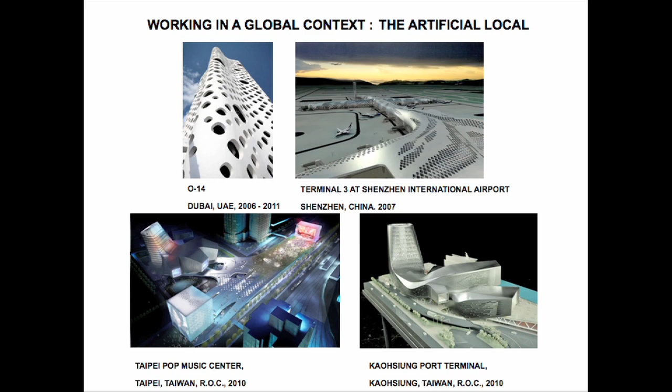Tonight we are going to talk about recent work, mainly about 3 projects: the O-14 Tower in Dubai, the Pop Music Center in Taiwan, and the most recent competition that we won last year for the Kaohsiung Port Terminal. We're also just going to touch on the airport project.

The main thrust of the lecture, because it intersects our practice, is about working more or less remotely and doing projects that occupy a very different notion of context than a classical understanding of place. Nanako and I will try to describe how the logics of construction, the way projects are designed and executed, have really shifted the territory of context, and as a consequence have resulted, for better or worse, in new kinds of cities—ones that can't be connected back to traditional form making or to traditional notions of society.

Dubai is one of those non-place places, almost an instant city and an instant urbanism, and that was the opportunity for us to finally realize a major project. I'm going to show O-14 first, and try to open up some of the issues that have retrospectively interested us about Dubai and other places.

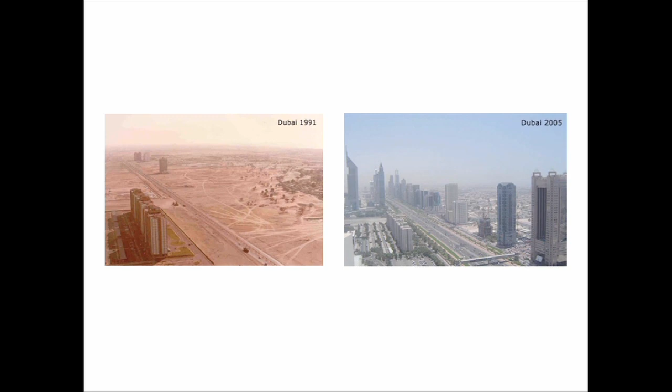One of the signal features of these places is that, since they're designed from nothing, they're programmed almost like one would program a building. Within Dubai you find the development of micro-cities, each themed, each more or less monofunctional, meaning there is very little mixed use. The way people work, live, and play is very strange because they have to drive miles to get to work—there were almost continuous traffic jams, at least up until about 3 years ago.

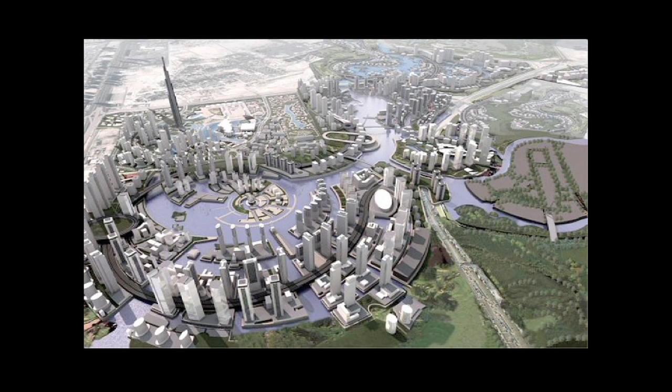There were very few options in terms of how one could live one's life. You'd basically go to a place where you'd live, to a place where you'd work, and to a place where you'd play, all by car and all back into an air-conditioned environment. A very strange place, and even stranger were the projections made for these mini-cities. This is Business Bay—an early rendering—where our O-14 is located. We called it a little slice of hell.

It was just so relentlessly oppressive in its initial planning that we had to come up with something different. We were working not at the planning level, but just at the scale of the building, but our building would somehow have to step outside of the developer norms expected in this master plan.

That was something we discussed closely with the developer, Shahab Lutfi, who was a really willing and expert partner in trying to overcome the strange homogeneity automatically expected as part of these developments. This is the reality of the site, what we first visited when we came. So you have these slick renderings and pamphlets on one hand, and then the reality of the place, as yet mainly unbuilt.

So, like I said, the final results are not characteristic of anywhere. Kuala Lumpur, Shanghai to a certain extent, and of course Dubai, are more similar than they are different.

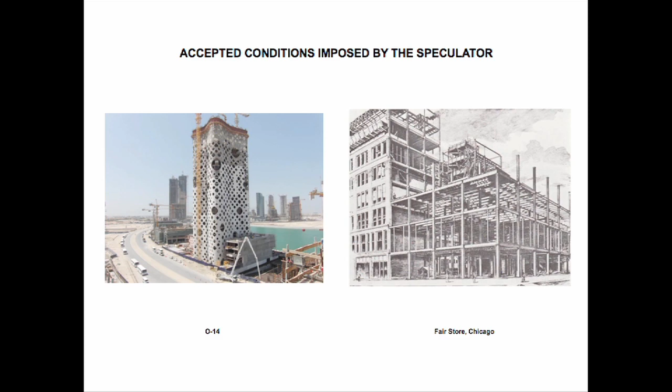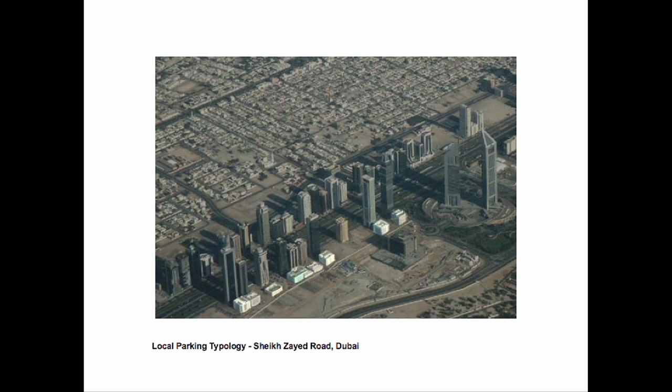It wasn't just about icons, but also about operational issues in the city, because as a consequence of all those micro-cities, themed cities, you get a proliferation of tall buildings along main streets. This is Sheikh Zayed Road. And then just behind all those tall, iconic buildings, you get one after another a series of parking structures. So you get a very active frontage with the iconic building, and all the pragmatic stuff happens behind, but that street is completely dead. People don't really walk around on the street, they're delivered almost entirely by car, so this is accepted — but it was something we wanted to challenge.

We were given a set of very precise codes to follow in Business Bay, mainly developed by the British firm Halcrow. I have a soft spot for Halcrow because one of the founders was involved in the design of the Lancaster bomber and other interesting things during the Second World War, but I'm not terribly excited about what grew out of that firm in terms of planning regime, because it was what Rem would call sort of sub-postmodern in the way the city is understood. So you'd have a very active podium base, an arcade, just in front of the building, and then the ubiquitous parking structure behind.

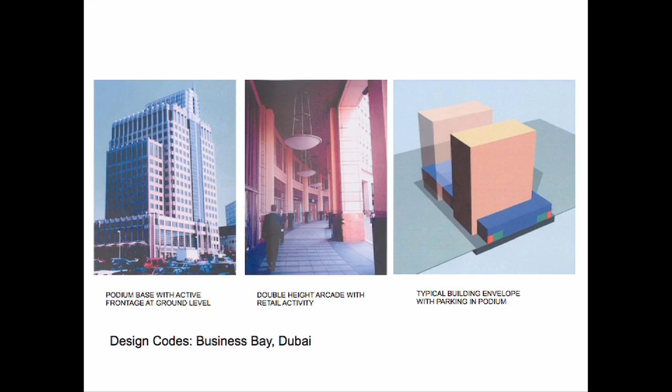Working with our developer, we tried to work within the code, but also to find ways around, especially the aesthetic strictures of the code, and argued successfully to implement them. Instead of just a podium base with activity at ground level, we were interested in the possibility of public activity on two levels, because the podia here would be connected.

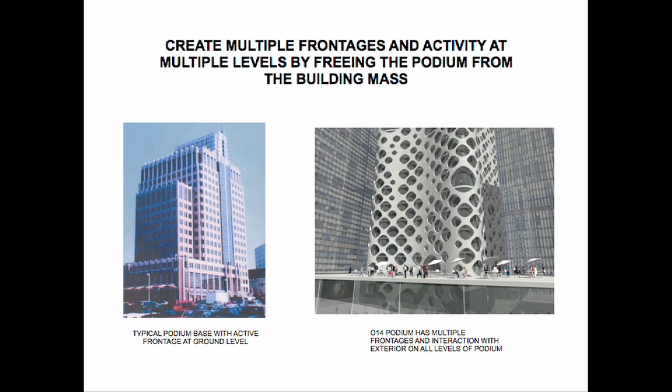Instead of an applied arcade, we started to think through the issue of the building envelope and the possibility of creating an arcade-like space, behind the exterior shell and the lobby, and have that function as a covered place to be away from the sun, and even potentially where street vendors could work.

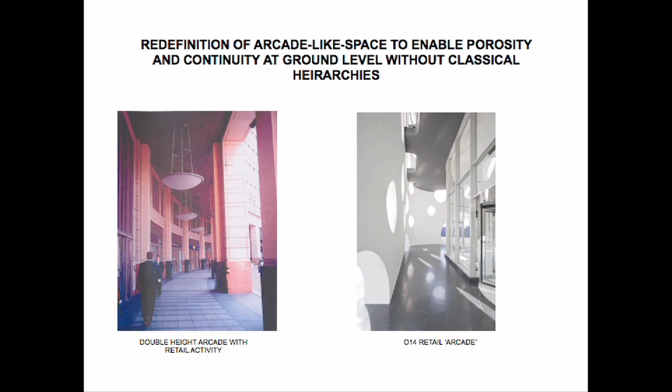And the other thing that was really important, especially on the site that we had, was to free the ground plane. Now these are very modernist moves, but it was important with this building because it was directly on the esplanade at Dubai Creek, so one could use the building like a gateway, where the general public could move under a super elevated podium and access that waterfront esplanade. Typically the podium is filled with cars from ground up, but we convinced our developer that because of that site, he could get more rent by programming that space instead of filling it with cars, and also free the ground plane.

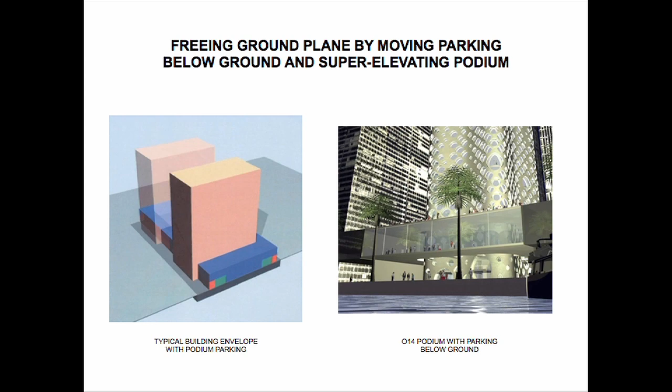So it's higher than Lever House.

We saw the building not just as an isolated object, but especially at the level of the podia, that those should be connected, with park space and public space developed. As it turned out, the podia are connected but also divided. It was an unfortunate issue in Dubai that they didn't allow for that second level of public space, but it was important for us - maybe that's the utopian part of the project - that we still have it there so that at some future date that ground plane might be opened up.

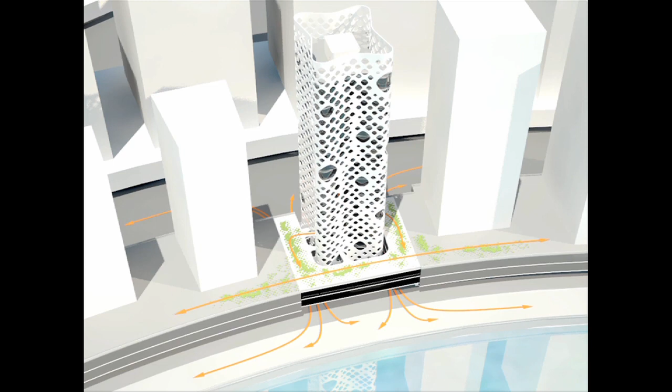And then the podia would be more or less distinct from the tower form, and bridges would connect into the tower. So it was important to see those things as really articulate from one another.

I'm going to go into a bit of a digression here, but it's an aesthetic issue very dear to our hearts. It's a question of, because we're using very advanced tools and computation, a lot of people in our generation felt intuitively a certain resistance - maybe because we came out of Cooper Union where working with people like Sue Gussow sitting in the audience here, drawing and physical building-making were tremendously important. So the sensibility from that training puts us in a peculiar relationship to the excess that the computer is capable of producing.

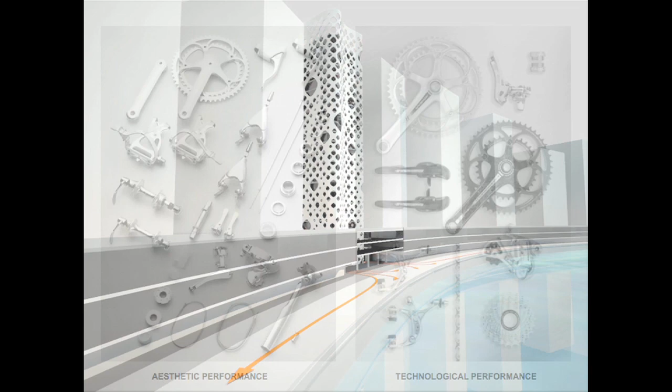So I want to talk about these bicycle parts for a second, because it was a very interesting moment for me. These came out, the ones on the left, around 1987-88, designed by the Italian company Campagnolo. They were, and still are, considered one of the top flight bicycle parts companies. They were under attack by the Japanese at that point, because the Japanese had designed much more efficient, more rational bike parts. But Campagnolo was known for producing incredible jewels which functioned beautifully for racers, and the attention to detail was really unsurpassed.

But it's a really interesting moment, because they had to go up against a group who were using computers. These old tool and die makers, who were at the end of their careers, looked at some of the Japanese stuff and decided that they would do what looks like a computer would do, but did it totally manually.

What they finally produced, I think, is to me the ideal. History stopped when I saw those parts, I nearly wanted to die. It was just so beautiful that my teeth hurt. That became a kind of aesthetic touchstone for us, that we would use the computer, but it was always a battle between the almost infinite flexibility that a computer can do, and this kind of obsessive aesthetic. So we hope we can produce things as gorgeous as these.

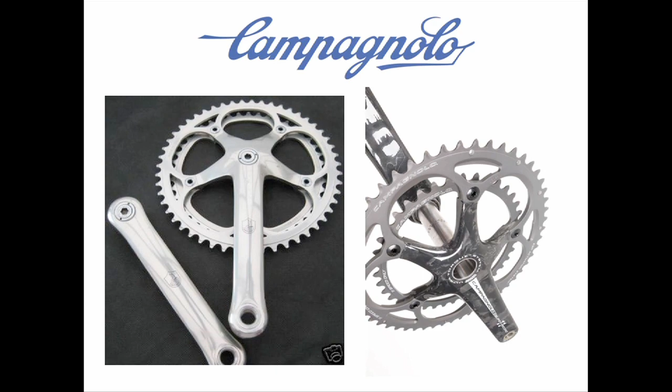That's our desire. Anyway, to get more philosophical for a second, one of the things we speculated on after designing 014 was the strangeness of the building. I remembered an essay by Walter Benjamin called The Work of Art in the Age of Mechanical Reproduction. He talks about the force of natural objects, and the mountain is given as a kind of exemplary natural object that's rooted. It's the opposite of a mass-produced thing. And it produces what he calls the effect of distance, which is also a kind of sublime.

It's very hard to show here because you really need to be driving by 014, but because of the ability to produce continuous variation, to produce things that appear to be somewhere between the natural and the artificial, you get that kind of aura emanating out of the objects, that they're quasi-natural, I would say. Another thing more technically associated with Benjamin's argument is that the mountain is a kind of single original. The situation in old production is that you have originals and you have copies. Now, what we as architects and designers do is produce iterations. We don't really produce originals anymore. So in a way, the whole situation has flipped.

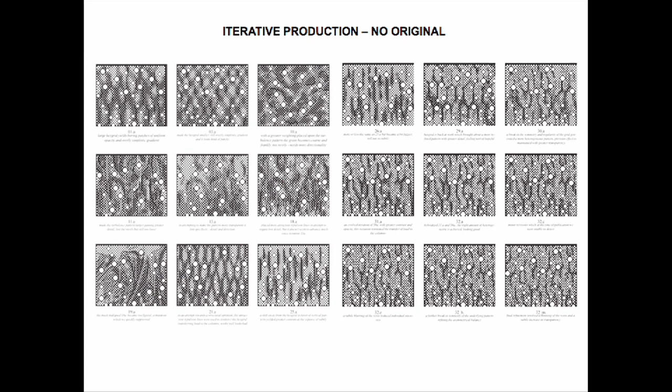That also leads me to compare different directions in attitudes and work to context. Woody Allen's Zelig is the kind of essential shapeshifter. He becomes the context, he becomes whatever he's close to. So he can become an Indian, a black jazz musician, a Nazi as soon as he gets close to those people. I would say that's one form of contextualism in architecture, where, as an Italian architect, you look at the local culture and then you try to do a kind of updated version of the traditional craft culture, traditional society's architecture.

I think a much more interesting figure as an analog would be Chauncey Gardiner. The way in which this character in Being There basically becomes a kind of empty cipher. People project meaning onto him, but he's actually talking about some very simple things, he's talking about gardening. So I hope our work, in a way, can be read that way. Good.

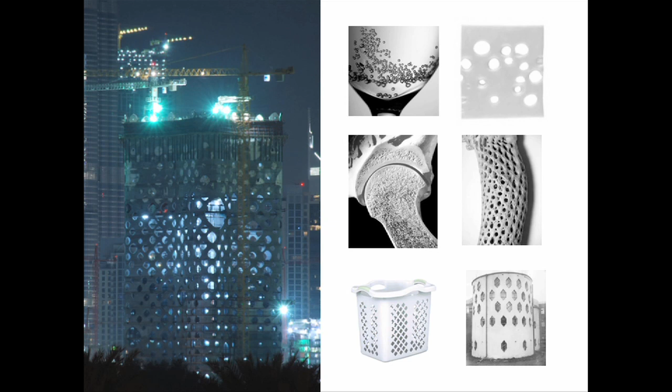I would want to say that the kind of use of the diagrid in the structuring of the 014 tower does resonate with traditional crafts and with the minor arts. But actually, we weren't interested in basket weaving from that direction because of our own obsessions. We were looking at geodetic basket weaving in Wellington bombers. So the origin really isn't that important, but the effect is.

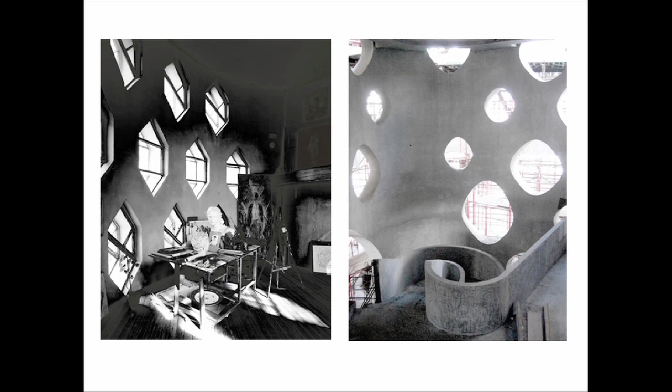Likewise, the building, the exoskeleton shell, can be very clearly associated with bone, and others have, of course, associated it with laundry baskets or Melnikov's house. So there are many, many projections onto the meaning of the building that are in a way out of our control. This came out of a blog, a Russian blog, where the writer was really convinced that we were looking at Melnikov's house. At first I thought it was absurd, but then I started to think, yes, that's true. I mean, even if we weren't consciously looking at it, there was a connection. It definitely resonated.

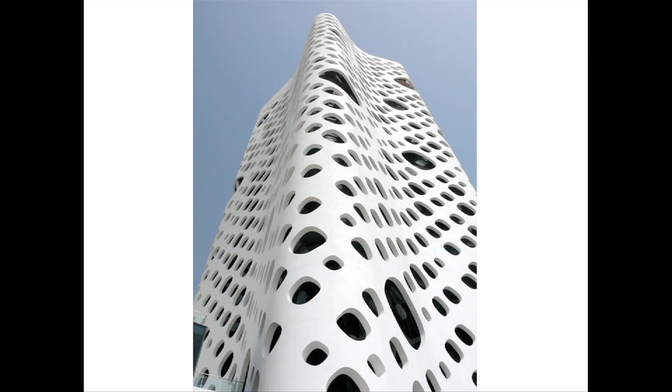So yeah, I'll quickly talk about the basic organization of the building. It's a soft cruciform plan. The exoskeleton of this building is in concrete. It's 22 stories high, and then it's surrounded by a two-level elevated podium, and then finally, because we argued so strenuously, we were able to put all of the cars below grade.

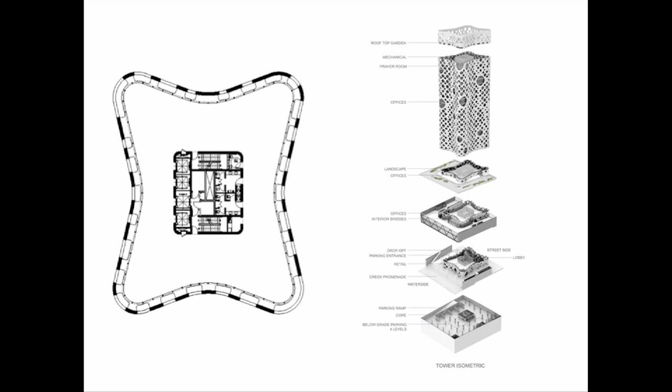So a very simple kind of plan form that was, in its final form, a straight extrusion. But we went through a whole series of iterations before we arrived at that point, and that was part of the discussion with the developer.

At first, he wanted us to do a design based upon the 84-story tower that we proposed in that competition. Of course, it's a quarter of the scale and size of the 84-story building, but he really wanted that kind of formal elaboration. We went through 16 or more iterations trying to balance the functions of what at that point was a mixed-use tower.

It was half residential, half office, and we needed to get it to fit in this complex envelope, and we completely failed. So we then developed a kind of mixed-use version, but a more conventional steel and glass building with a curtain wall and column and slab structure. We were really not terribly happy with it. It seemed like a bad compromise between the overly elaborated envelope and what we knew to be fairly common in terms of the appearance of buildings in Dubai with the curtain wall.

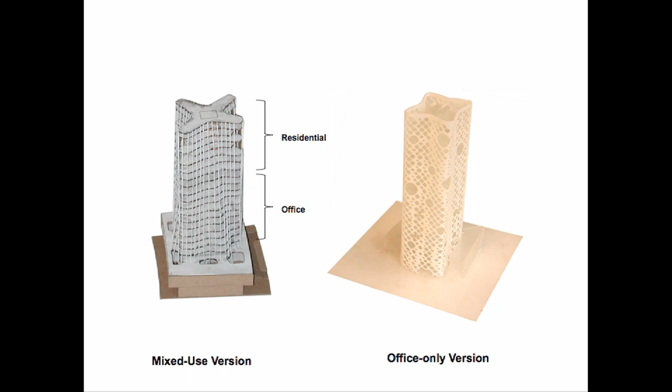So we worked very closely with Ysrael Seinuk, our engineer, and his team, trying to go beyond the normal expectation. The issue of an exoskeleton came up, and we started to explore that, pulling the structure to the outside of the building.

That also connected to some of the issues we were looking at in the Chicago Frame article by Colin Rowe, where he points to a really idiosyncratic and singular proposal in Chicago, which goes against the grid tradition totally, and that was Frank Lloyd Wright's St. Mark's Tower. In a way, O14 is the inversion of St. Mark's Tower. St. Mark's Tower, albeit residential, has a very strong central supporting core and then a series of cantilevering trays for the apartments in a pinwheel pattern.

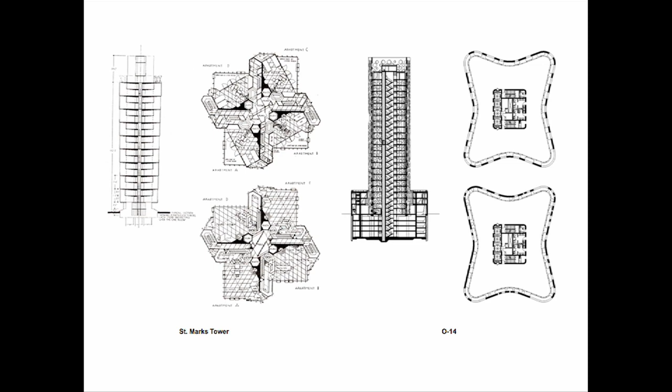We took that idea of the strong core and then expanded it. The core got pulled to the outside in a sense, and then the slabs hang from this very strong external structure. So it's a kind of inverse. Here is an illustration of that. Notionally, the columns go to the outside and fuse and become the shell.

Because of that, we have a structure fully on the outside, and in our initial investigations, we put glass in the holes. Well, it turned out that, given all of the tolerance issues in casting concrete, we would get really heavy frames around all of the openings. So we decided to pull the glazing back away from the structure, have that a meter inside, the meter being the minimal distance for window cleaning.

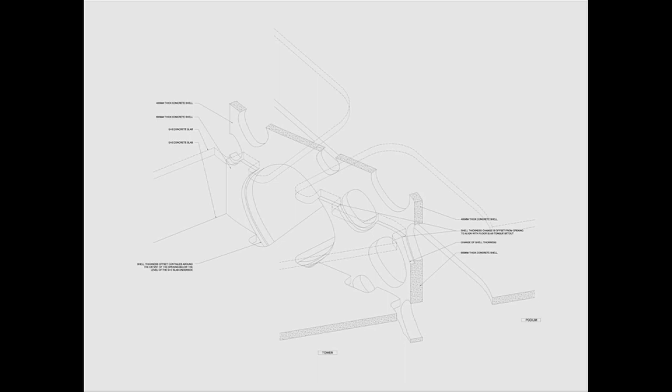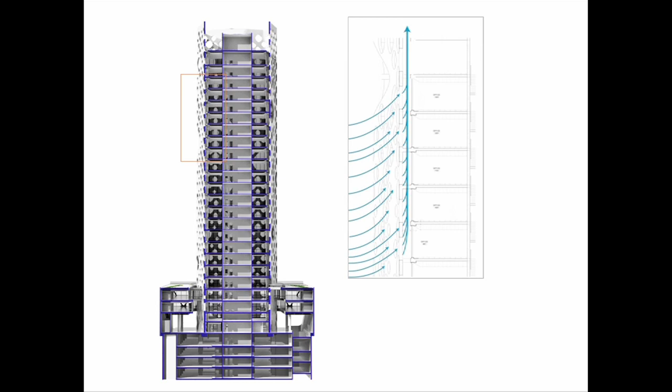In effect, we created an external structure, a sunscreen, and a cavity. That happened to be a really excellent passive solar system, because after we discussed it with our mechanical engineers, we minimized the connections between the external shell and the slabs, and we were able to really open up that space to create what they call a stack effect. The building saves about 30% of cooling costs according to the mechanical engineers because of that configuration. But it was really the byproduct, I have to say, of other operations that were mainly aesthetic and structural.

So this shows the stack effect in operation.

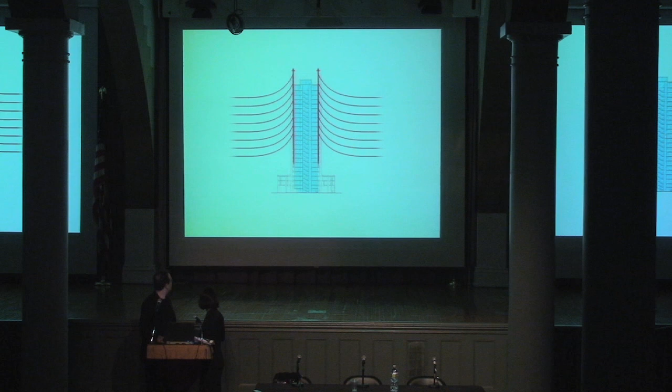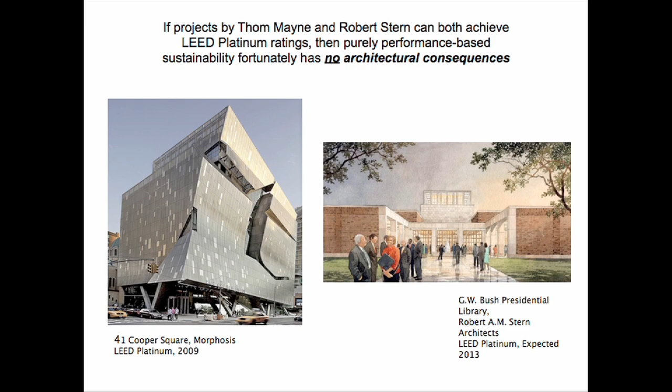So we have another aside about this whole issue of sustainability. I think it's really important to understand that sustainability is not really, when it comes down to it, an architectural issue. It's a very important health and safety issue, of course. It's our responsibility to do sustainable buildings. But it's also clear when you look at projects as different as Thom Mayne's building for Cooper Union, or the G.W. Bush Library by Stern, both of which received LEED Platinum ratings, that the whole issue of form and design is independent of it, which is, I think, the way it should be. It actually speaks to freedom of expression.

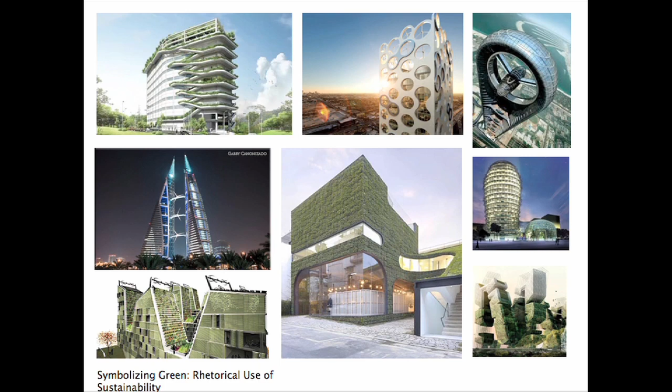And there really is no such thing as a sustainable style. Of course, one can always make it that way, and it then becomes a symbolic issue of whether you want your building to represent that. But strictly speaking, it's not something inherent to architecture.

So, that aside, the other issue that was very important in thinking through the building is to come up with a way of having a very simple mass for the building and then a very highly patterned envelope. We were doing that as a way of defeating obvious readings of the scale of the building, of how tall the building is, and being able to clearly define where floor levels were.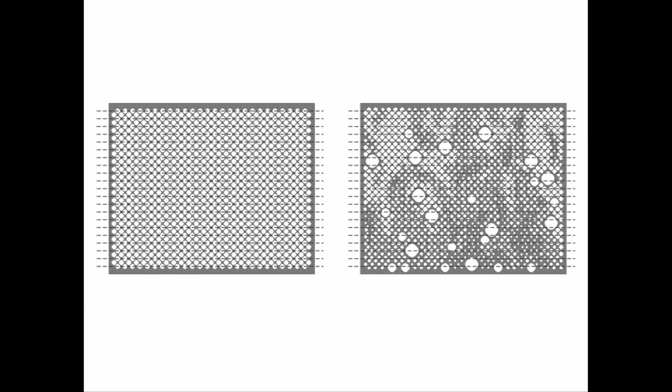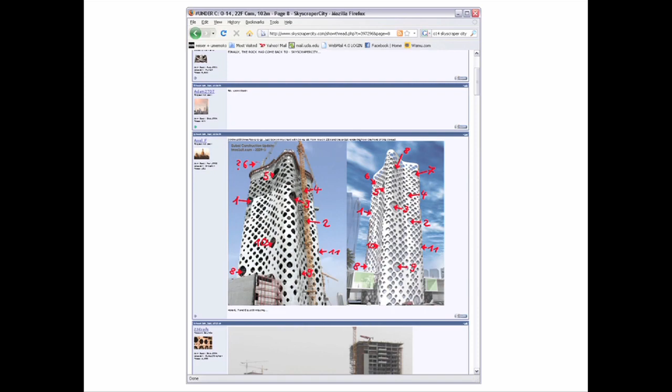This is a blog where the bloggers were trying to figure out where the floors were and where the openings were relative to the rendering in the final building.

So again, it was an iterative process, and once we set up the parameters, we worked with an extreme amount of redundancy in the structure. We knew we had quite a bit of latitude in terms of how we could distribute openings, and then it became for us almost a painterly exercise.

We basically didn't want the viewer to either understand the floor levels or to be able to track clearly the forces of the diagrid down to the bottom, so we'd create a kind of turbulence field that defeated those readings, where one would follow a solid area, it would diminish, it would shift over.

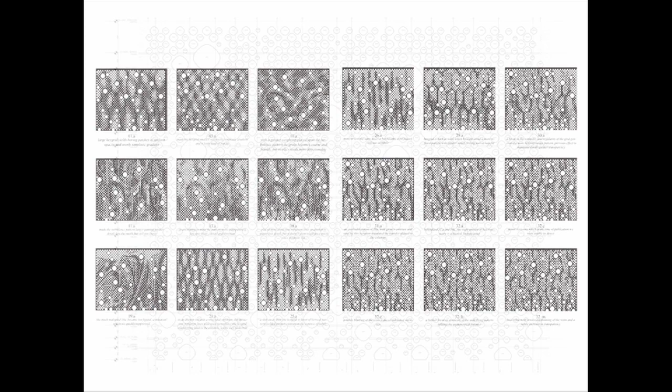It was a matter of working that logic and the solar screening logic against where we finally had to deliver the forces, which was towards the kind of regular column grid below ground. So that was a really interesting series of exercises.

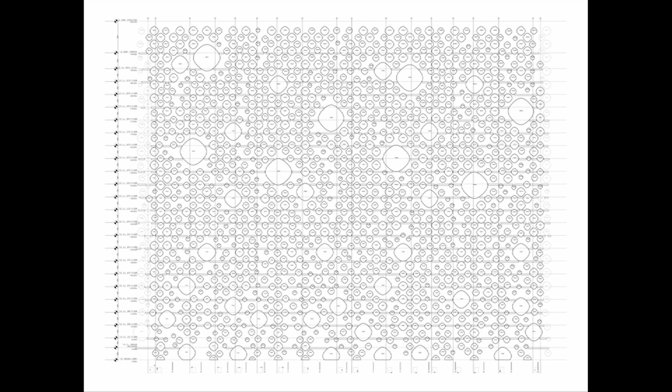So we finally came up with a satisfactory pattern, and this is the unrolled shell. All those horizontal dashes are the connections to the slabs.

So you get a very different reading of the building compared to the typically gridded skyscraper, where it reinforces the subject's position, the one-point perspective. Here, as you move around the building, you get very different oscillations of scale and very different shifting vanishing points when you look obliquely up.

It reminded me of something I had seen as a kid, the Yellow Submarine movie, where the Nowhere Man occupied the Sea of Holes, and you get this very strange sense of contraction and expansion in that universe. That was something that resonated with the project.

And it also, moving away from the purely phenomenal side of it, does very different things to the organization and the life of the office.

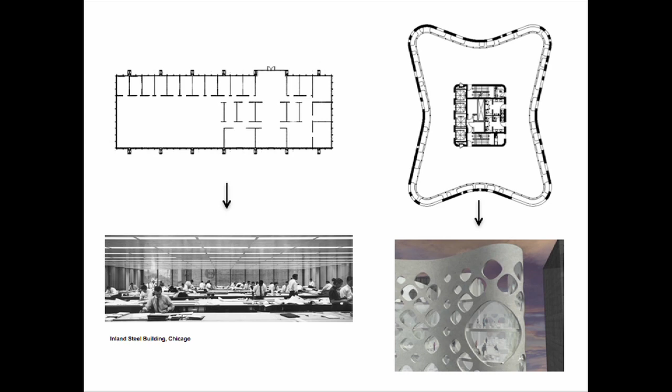So because there's such a variegated facade, moving from the effect of the building toward its operation, people, we hope, and they are starting to do this, organize the interior very differently. Whether they want a lighter space or a darker space depends on where they want to be, and it produces a very different atmosphere in the office than the kind of highly regimented systems before.

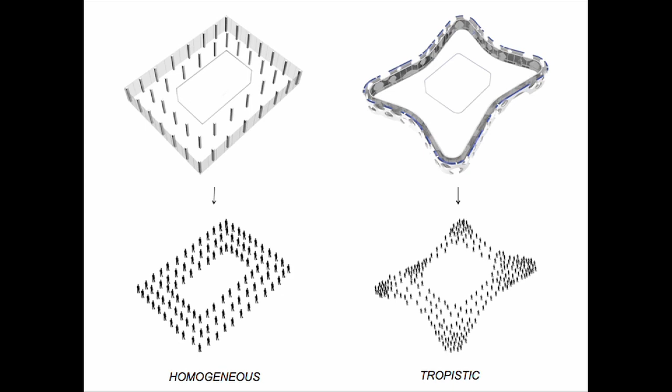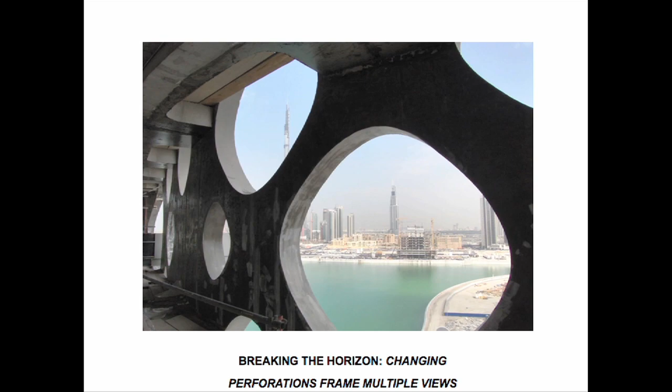Also, because the shell is a meter away from the edge of the building, you get very interesting staccato, oblique views up and down that you don't get in a typical curtain wall building where the glazing is right up against the slab edge.

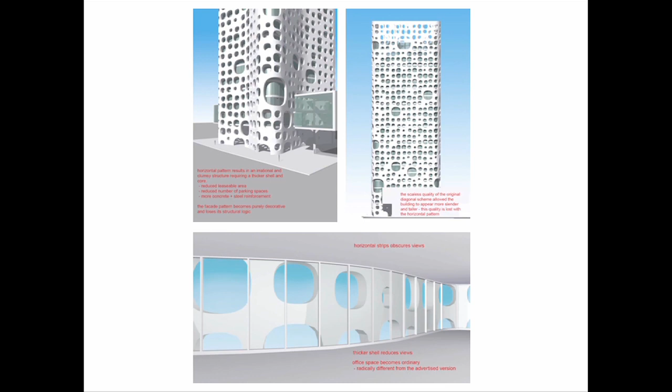This is an unfortunate iteration, from a moment when we were asked not to do the diagrid but to organize the openings in a horizontal and vertical pattern. Fortunately, we got our structural engineer involved, Ysrael Seinuk, who said it wasn't a true diagrid, it was a Vierendeel, it was corrupt, it was bad. We were delighted that finally the developer and the contractor put that aside and we got the diagonal.

There's also a really interesting thing that happens, characteristic of design today, because there's such a close connection between how we design in the office, fabrication, and the final result, that the renderings look shockingly like the finished building.

So there was a kind of material moment while the building was constructed where the concrete was really evident, but because of the automated formwork and an awful lot of hand work on the building, you get a really seamless sense of continuity, almost like a built rendering.

There's also a fourth state I'm not showing here, when the building is now kind of grimy and covered with sand, which is also fascinating because it's starting to look like a blasted, ancient desert plant. So the states of the building have been really interesting in retrospect.

And this is kind of an animation of the iterations we went through, working through the facade design, and as the forces track down the facade.

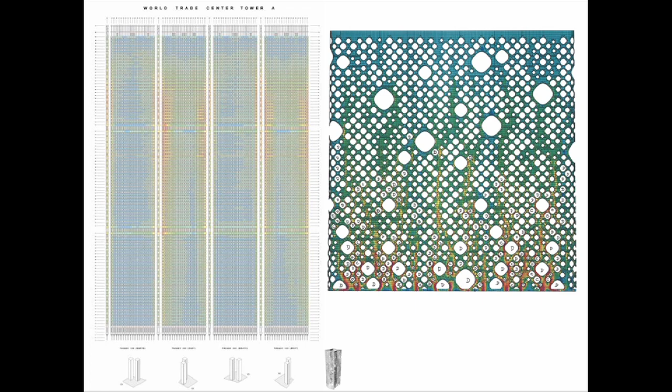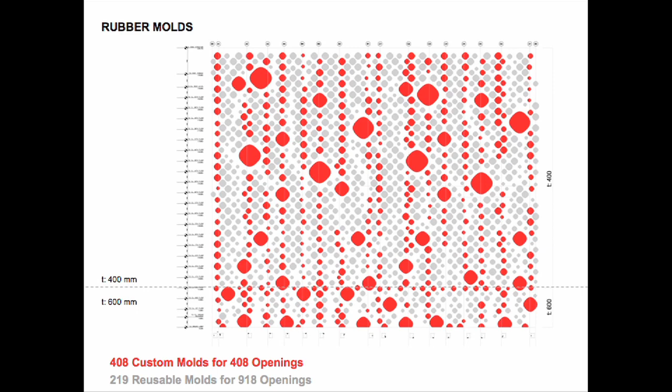We try to be very economical, so we came up with 5 standard openings. Here it shows 219 reusable molds for 918 openings. But at the end of the day, it's much easier to just make a new one for each hole. This meant we could have infinite variation of the holes.

Here is a construction shot early in the building showing the diagrid of reinforcement and the digital cut form, the void form, for the openings. And the shell changes thickness from 60 centimeters at the podium level, and from there it becomes 40 centimeters to the top.

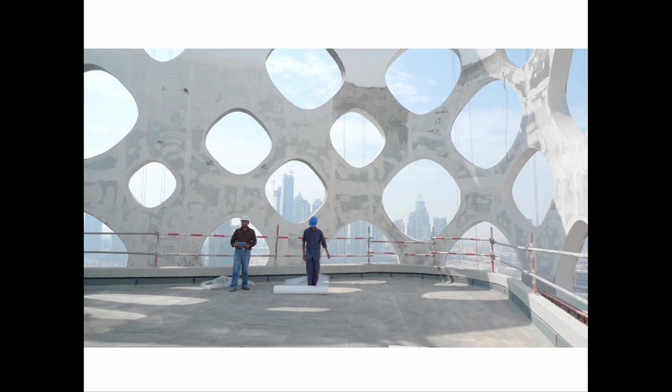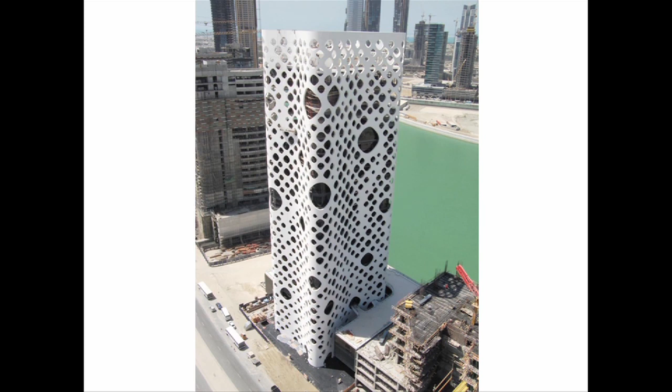This is the rooftop view. Each hole frames a different view here, and an overall view of the whole building. The podium is facing Dubai Creek and connecting to the building with multiple bridges.

And here, this building gives a different kind of relationship with the floors and openings. The podium is connected with multiple bridges, and a restaurant is located on top of the podium level, so people can go into the wider rooftop and enjoy the spectacular views.

And here, this is the arcade space between the window walls and exoskeletons. And here, when you look up, you can see the connection of the slab connected by tongues to the exoskeletons.

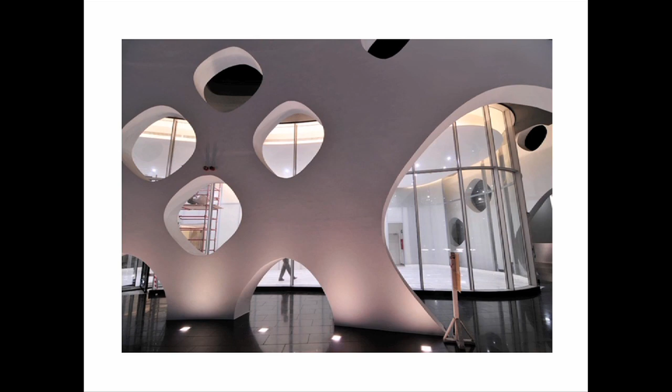This is the view looking down between the window walls and exoskeletons. Also, a series of tongues are coming from the slab connecting to the exoskeletons. View of the outer public space and arcade, looking into the lobby space.

O-14 and its neighboring construction with the Burj Khalifa in the background. Here is the detail of the exoskeleton at the roof level.

The slide shows the changing geometry of the openings as they move over the convex and concave surface of the shell. The wide view of the rooftop, and the reflection of the window wall, 1 meter back from the exoskeleton, enough space for the window washing platform and stack effect.

This view from under the podium shows how it is independently supported. It also shows the bridge coming out of 2 levels of podiums. This is the view of the lobby, expressing its compressed dog bone shape of the ceiling, and the reflection of the exoskeleton on the frosted glass core wall.